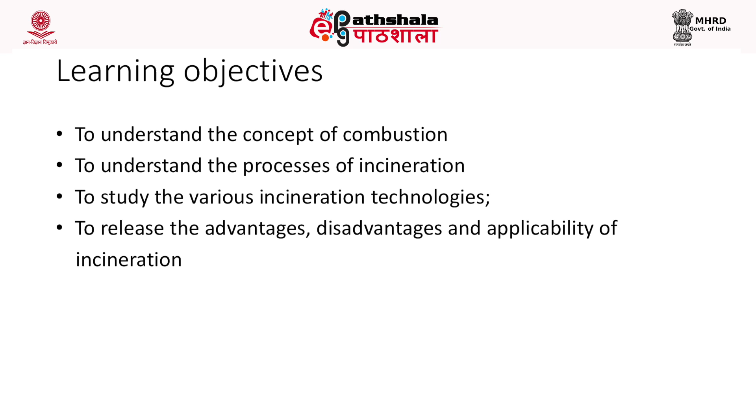So the learning objectives of this module include: first, to understand the concept of combustion, then to understand the process of incineration, to study the various incineration technologies, and finally we'll end up by studying the various advantages and disadvantages and applicability of incineration. Finally, we will also estimate the energy generation potential of various wastes.

Now, as I told you earlier, waste is an unwanted material that is of no use to the owner and hence is disposed of in an open area. Disposal into the land or water body is just not a solution, but they create a huge problem to the environment, thereby ending up in a lot of environmental and health hazards. The polluter pay principle, which is proposed in the Environmental Protection Act, it is for the environmental protection, and this acts as a force for the industries to treat the waste prior to disposal.

Thermal treatment is one option which uses a very high temperature to degrade or destruct the waste. They are designed to thermally degrade the waste and recover energy in the form of heat or electricity. Its main purpose is to reduce the impact of the residual waste on the environment.

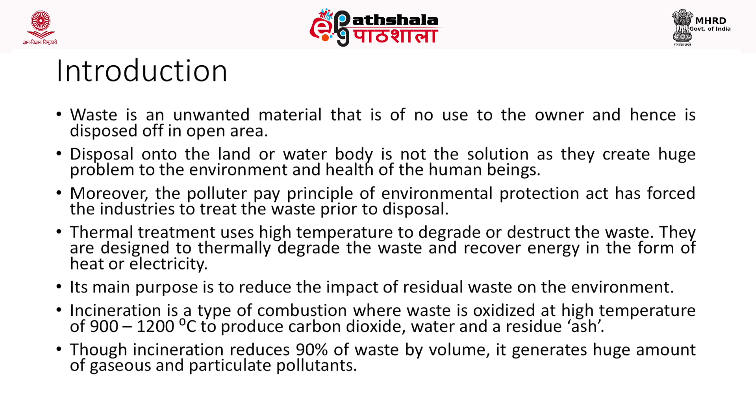So as I told you earlier, incineration is a type of combustion where the waste is oxidized in the presence of oxygen and high temperature of around 900 to 1200 degrees Celsius, resulting in the production of carbon dioxide and water and a residue called ash. Though incineration process reduces 90% of waste by volume, it generates a huge amount of gaseous and particulate pollutants. Now let's look into the combustion and then we will study about incineration.

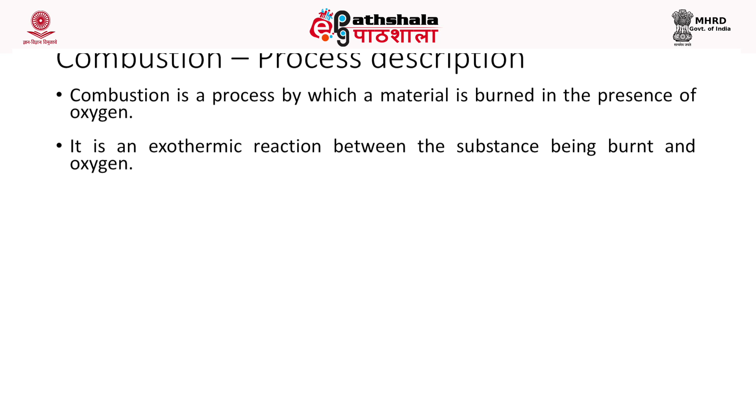Now what is combustion? Combustion is a process by which the material is burnt in the presence of oxygen. It is an exothermic reaction between the substance being burnt and oxygen. Combustion breaks down the organic and inorganic substances into a stable end product, carbon dioxide and water. The reactions occur between carbon and hydrogen and oxygen present in air to form carbon dioxide and water.

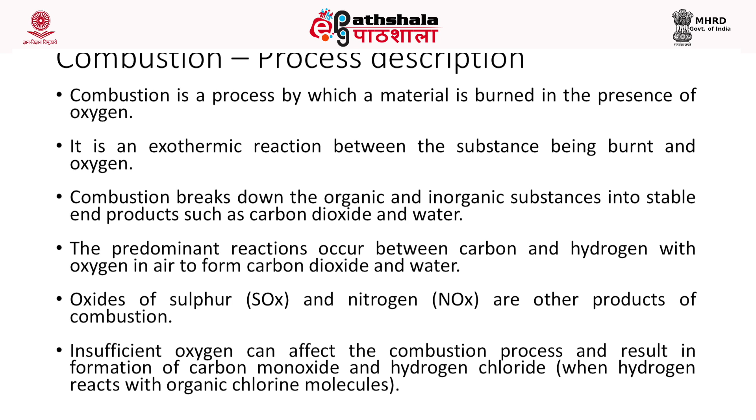In addition to carbon dioxide and water, the oxides of sulfur and oxides of nitrogen are also released during this process. Insufficient oxygen can affect the combustion process and they might result in the release of carbon monoxide, which is a very dangerous gas. As you all know, carbon monoxide is a very dangerous gas which combines with the hemoglobin of your blood and it reduces the oxygen carrying capacity of blood, which can be fatal. Carbon monoxide is harmful and hence to avoid its formation, you have to flush in sufficient amount of oxygen into the chamber.

All combustion furnaces should be provided with good mixing facilities to provide uniform distribution of air throughout the waste material and other gases released during the burning of waste. At the end of the combustion process, an incombustible particulate matter called bottom ash is left in the combustion chamber or the incinerator. Some amount of particulate matter is also emitted through the chimneys, and this is termed fly ash. So the particulate matter which is emitted outside the chamber along with the flue gas is termed fly ash.

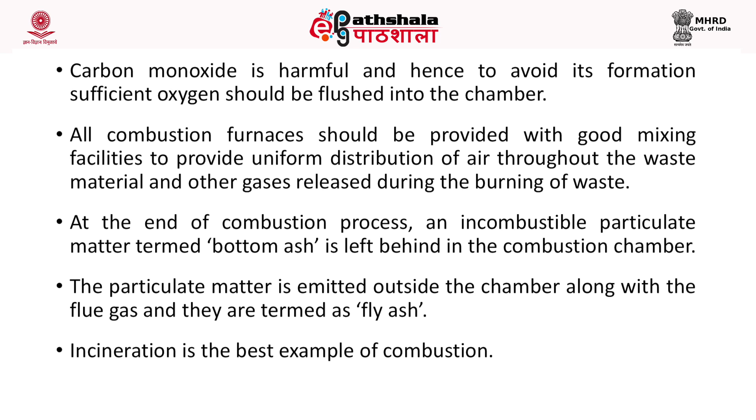Now, the incineration process is one of the best examples of combustion. As I told you earlier, incineration is a combustion process where the waste is burnt in the presence of oxygen at a very high temperature of about 900 to 1100 degrees Celsius. This temperature is selected, one, to ensure good combustion, second, to eliminate odor problems, and third, to protect the walls of the incinerator. Incineration is termed a thermal treatment and is considered the best alternative route for disposal of solid waste.

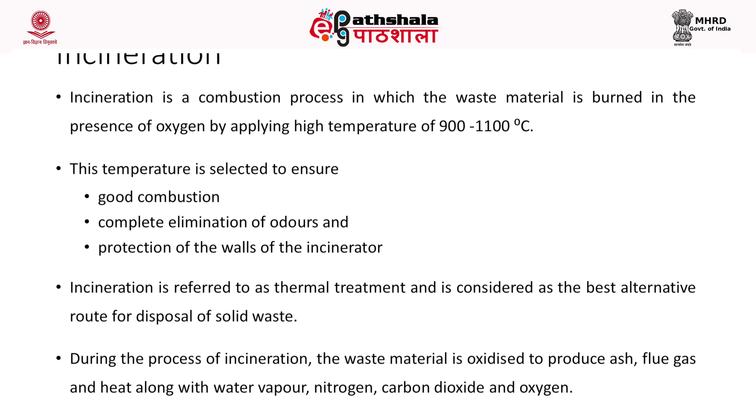During the process of incineration, the waste material is oxidized to produce ash, flue gas and heat along with water vapor, nitrogen, carbon dioxide and oxygen. In addition to carbon dioxide, other gases like carbon monoxide, hydrogen chloride, hydrogen fluoride, nitrogen oxides, oxides of sulfur, volatile organic carbon, dioxins, furans, and PCBs are also produced depending upon the nature of waste and the availability of oxygen.

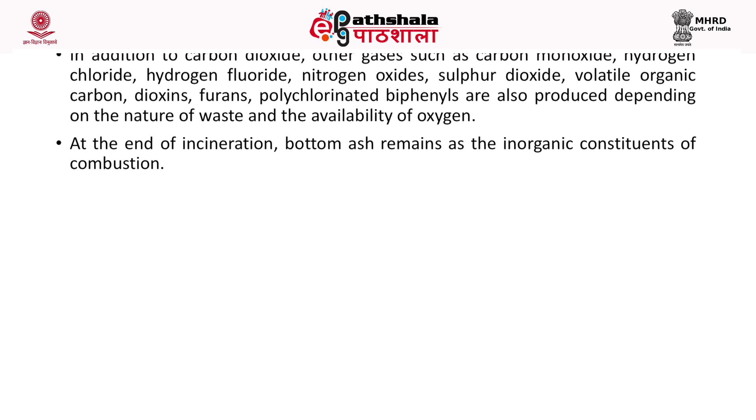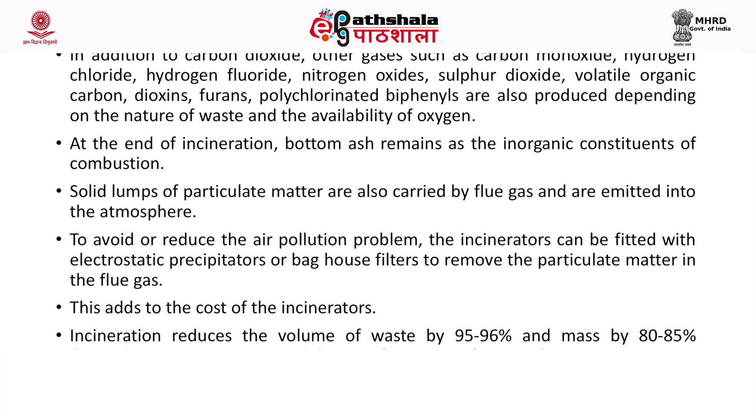At the end of incineration, bottom ash remains as the inorganic constituent of combustion. The solid lumps of particulate matter are also carried by flue gas and let out, which is called fly ash. In general, to avoid the emission of this particulate matter, that is the fly ash emissions, it is essential for a particular user to install an air pollution control device such as an electrostatic precipitator to remove this particulate matter so that it will not be released outside into the environment.

So, to avoid or reduce the air pollution problem, the incinerator can be fitted with electrostatic precipitators or baghouse filters to remove the particulate matter in the flue gas. And this adds to the cost of the incineration process. Incineration reduces the volume of waste by 95 to 96%, and by mass it reduces by 80 to 85%, depending upon the combustion and the degree of recovery of materials.

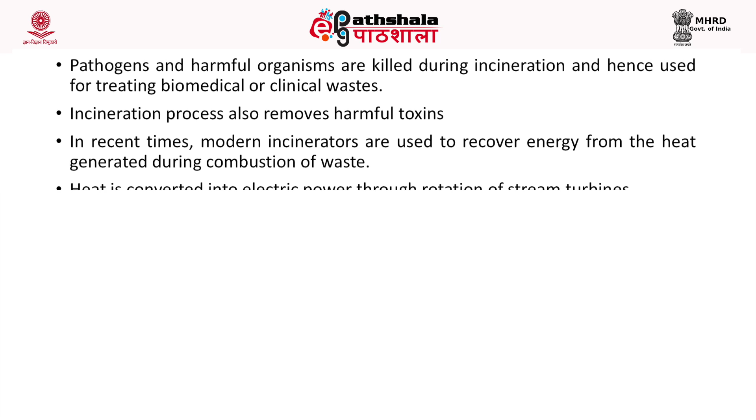At this high temperature, it also possesses the advantage of killing pathogens. The pathogens and harmful organisms are killed during incineration, and hence it is used for treating biomedical or clinical waste. The incineration process also removes harmful toxins. In recent times, modern incinerators are also used to recover energy from the heat generated during this combustion process.

Now, this energy can be used and converted into electricity. Since this advantage is associated with incinerators, they are categorized under systems where wealth can be recovered from waste. They are also called waste to energy processes. The heat that is generated from these incinerators is converted into electricity using steam turbines.

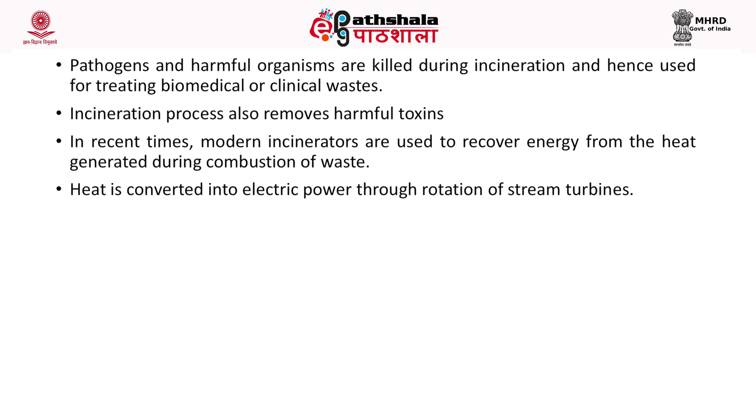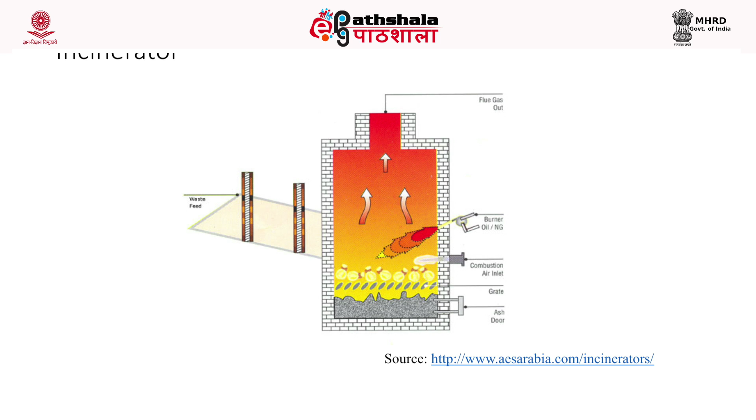Now this image shows the incinerator, where if you can see, it's a double walled furnace where the waste is added and heated in the presence of oxygen to produce ash and other gaseous products. Now ash, again as I told you, is of two types: bottom ash and fly ash, and you also have other gaseous pollutants. Now, what are the advantages of the incineration process?

First, incineration requires less space in landfills. As incineration reduces almost 95% of waste volume, the ash that is left as residue is taken to landfills for disposal. This reduces its space in the landfill. Second, incineration can be carried out near the point of waste collection. That means at the source of generation itself, you can install an incinerator and continue with the process, because they are considered compact units.

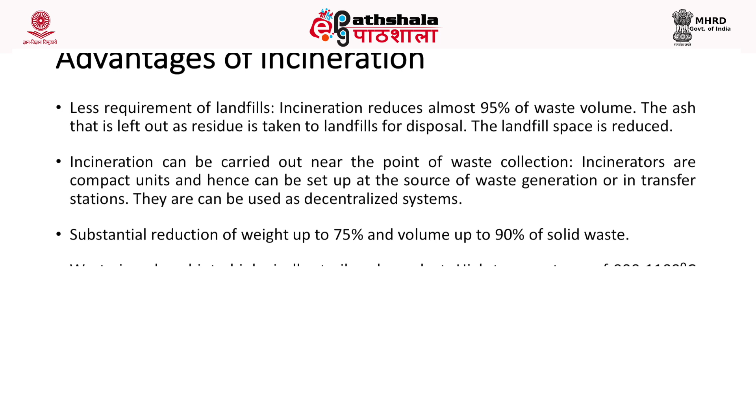So incinerators are compact units and hence can be set up at the source of waste generation or in transfer stations. They can be used as decentralized systems. Incineration results in substantial reduction of weight by up to 75% and by volume 90%. Also, it makes the product sterile. Waste is reduced into a biologically sterile ash product.

At high temperatures of about 900 to 1100 degrees Celsius, the pathogens and other harmful organisms present in the waste are killed, and hence it is sterilized. The residue, that is the ash which is left after incineration, is hence termed biologically sterile.

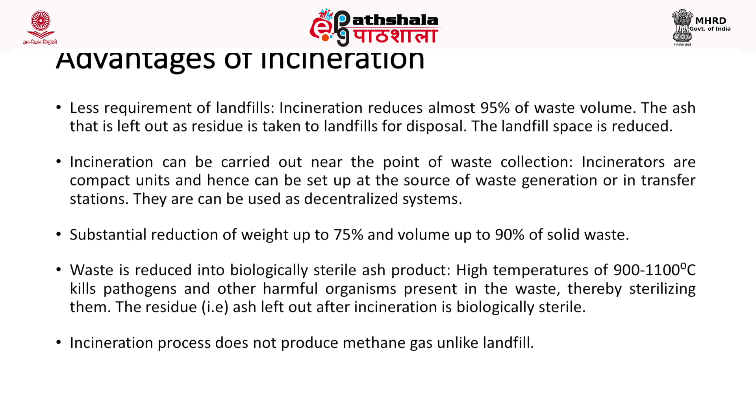The incineration process does not produce methane gas, unlike the landfills. As I mentioned earlier, it is also termed as a waste to energy process. Waste incineration can be a source of low cost energy to produce steam for electric power generation, industrial process heating, or hot water for district heating, thereby conserving primary fuel resources.

The bottom ash residue is considered as non-injurious and it can be used for material recovery or as secondary aggregates in construction. It is the best practical environmental option for many of the hazardous wastes like highly flammable, volatile, toxic and infectious waste.

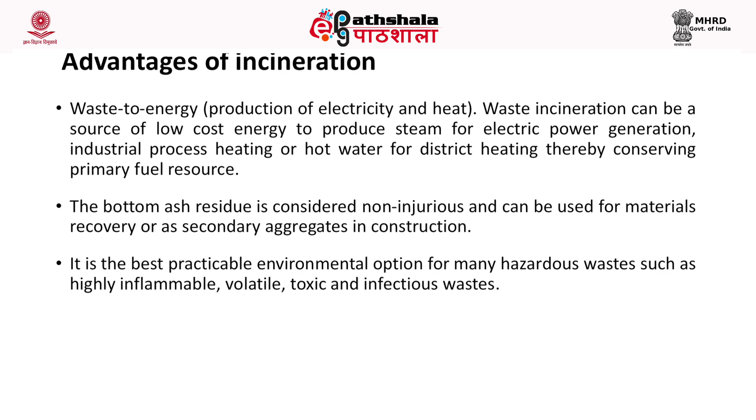Now the disadvantages. First, the main disadvantage of the incineration process is the emissions from these incinerators. During the process of incineration, a lot of gases are generated. Gases such as carbon dioxide, carbon monoxide, oxides of sulfur and oxides of nitrogen are commonly emitted during the process of oxidation. They are serious air pollutants.

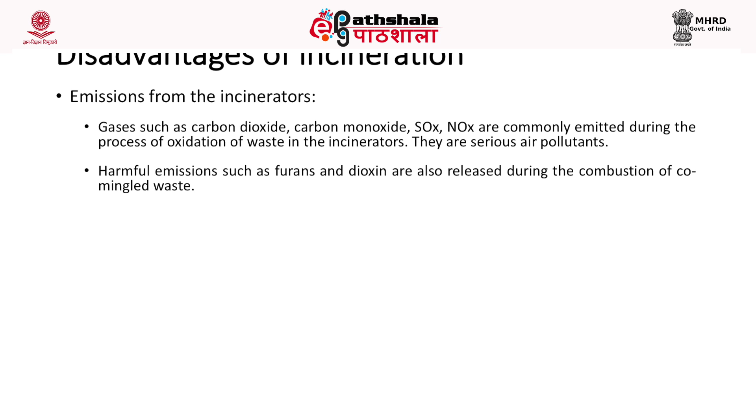Harmful emissions such as furans and dioxins are also released when you burn commingled municipal waste. The fly ash also contributes to particulate air pollution. These air pollutants endanger human health and also the environment, and hence they require air pollution control devices.

When you inhale this particulate matter, it can deposit in your respiratory system and lead to various breathing and respiratory problems. So that is a problem with particulate matter, and the gases, as you all know, have health effects. In addition to that, they also lead to a lot of environmental problems.

The second disadvantage is that it involves high investment, operation and maintenance costs. As incineration involves very high energy, around a temperature range of 900 to 1100 degrees Celsius, it is considered an energy intensive process, and hence it consumes more electricity for burning the waste. Thus, the cost of operation remains high.

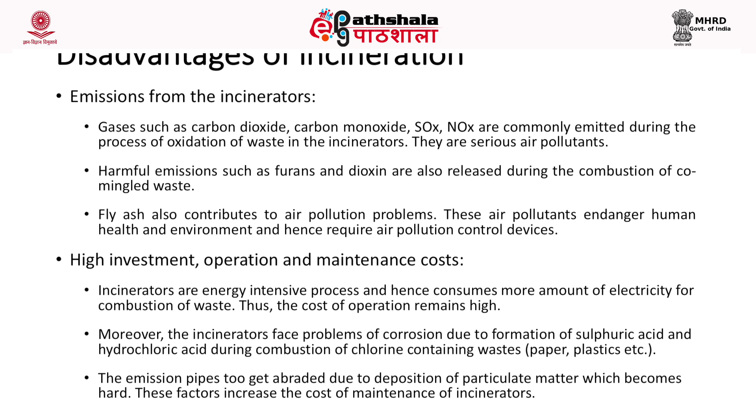Moreover, incinerators face problems of corrosion due to formation of sulfuric acid and hydrochloric acid during combustion. The emission pipes too get abraded due to the deposition of particulate matter, which becomes hard. These factors increase the cost of maintenance of these incinerators. A high capital investment cost is also involved for constructing these incinerators.

An inorganic residue produced by the incineration process further needs safe and proper disposal. Incineration plants are producers of a lot of heavy metals which are injurious even in minor amounts. Although modern incinerators comply with existing legislation, there is some public concern that the emitted levels may still have adverse effects on health.

Incineration is designed on the basis of a certain calorific value of waste. Removal of materials like paper and plastics for recycling may reduce the overall calorific value and may affect incinerator performance. Local communities have always opposed the presence of incinerators in their locality due to the problems associated with gaseous and particulate emissions. They also require skilled operators, which again adds to the operation cost.

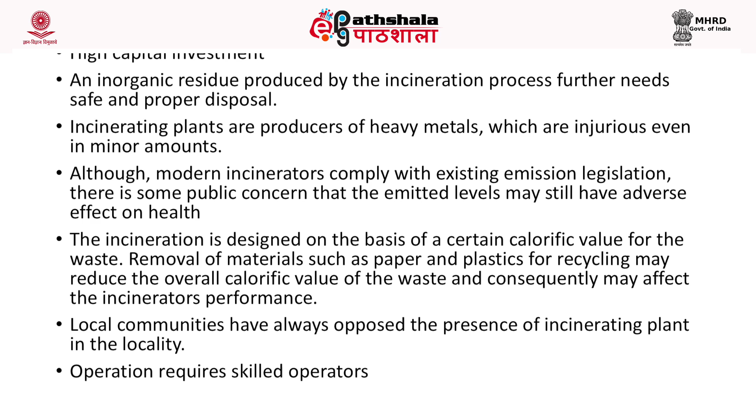Now, when can this incineration process be applied? Incineration can be applied only if the following criteria are fulfilled. First, it can be used in places where waste management has been practiced for a number of years. Second, at least 50,000 metric tons of waste should be available per year. Also, you should take care of the calorific value of waste, because it is very important to achieve efficient incineration.

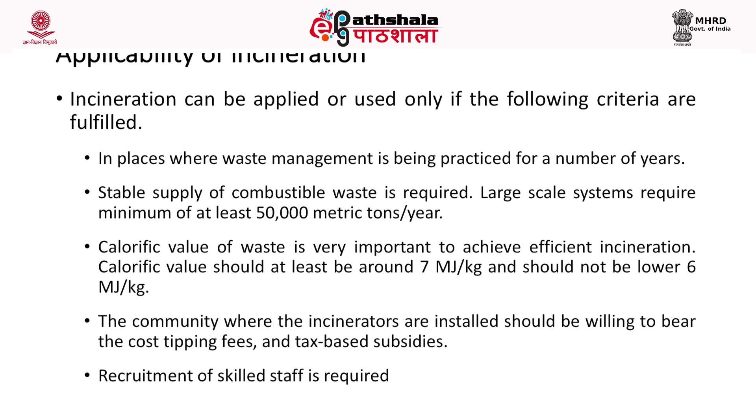The calorific value should be at least 7 megajoules per kg, and it should not be lower than 6 megajoules per kg. The community where the incinerators are installed should be willing to bear the cost of tipping fees and tax-based subsidies. The recruitment of skilled staff is also required if you go for an incinerator as an option. Now, let's look into the various systems available for the incineration process.

An incinerator is designed to maximize the combustion efficiency of waste and heat output. It should focus on minimizing emissions by balancing oxygen and time, temperature and turbulence. The 3 T's, that is time, temperature and turbulence, should be maintained throughout the process. On the basis of the capacity, nature of waste to be combusted and the type of system, incinerators are classified into the following types. 1.

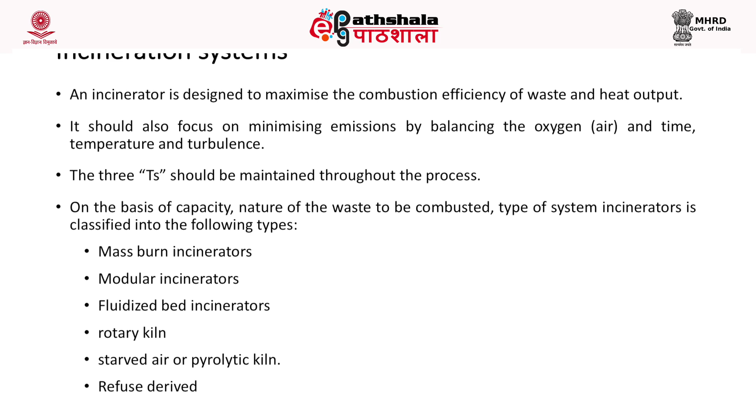The mass burn incinerator, modular incinerator, fluidized bed incinerator, starved air incinerator, refuse derived fuel and rotary kiln incinerators. Now, mass burn incineration. Incineration done on a large scale is termed as mass incineration. It is a simple and a flexible method and is most commonly used for municipal solid waste.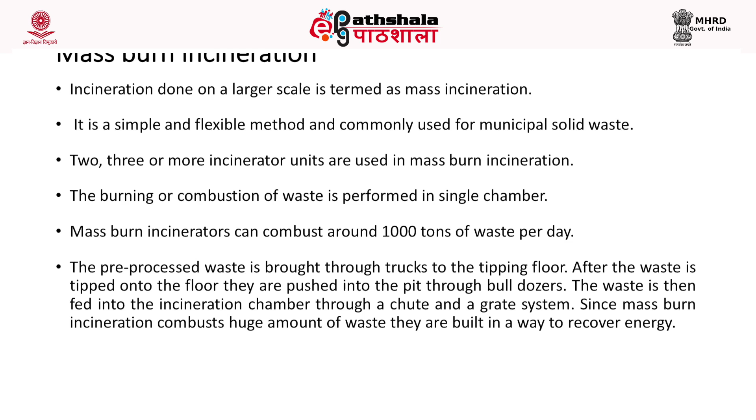The waste is then fed into the incineration chamber through a chute and a grate system. Since mass burn incineration combusts huge amounts of waste, they are built in a way to recover energy. And in case of modern incinerators, it consists of a refractory lined combustion system with steam generator to recover energy in the form of

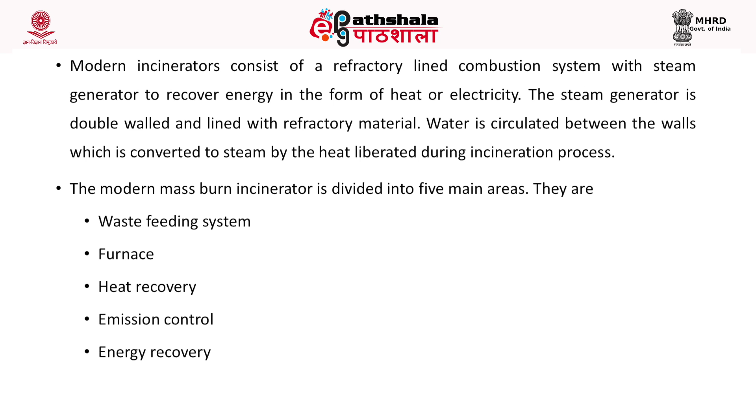heat or electricity. The steam generator is generally double-walled and lined with a refractory material. The water is circulated between these walls, which is converted to steam by the heat liberated during the incineration process. The modern mass burn incinerator is divided into 5 main areas. They consist of a waste feeding system, a furnace, heat recovery, emission control and energy recovery system.

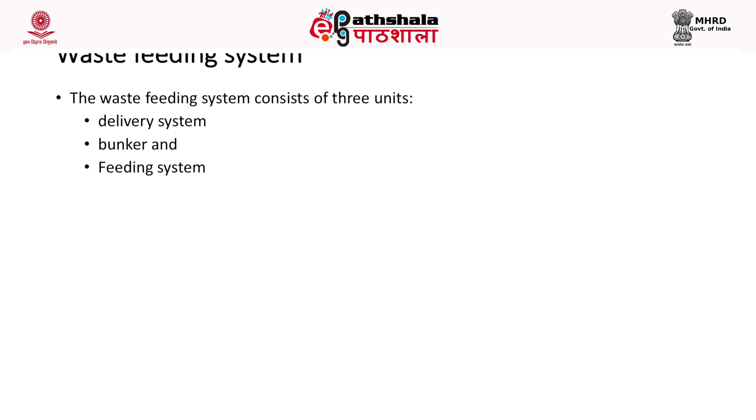Waste feeding system. The waste feeding system consists of 3 units: a delivery system, a bunker system and a feeding system. The waste collection vehicles that enter a processing site are weighed at the entrance on arrival and departure to determine the charge for disposal and incinerator operation. The waste brought to the processing site is stored in bunkers till it is fed into the incinerators. Bunkers in general act like temporary storage sites.

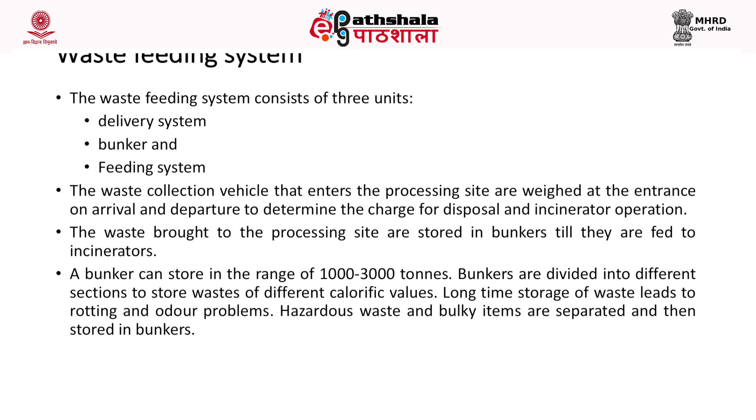Bunkers can store waste in the range of 1000 to 3000 tons. They are divided into different sections for storing the waste of different calorific values. Long-term storage of waste leads to rotting and odor problems, and hazardous waste and bulky items are separated and then stored in bunkers. The feeder consists of a steel hopper through which the waste is fed into the incinerator, and through the grate by hydraulic ram the waste is fed.

To avoid any air leakage into the furnace, the hoppers are half filled with waste and the hydraulic shutters are used to seal the hoppers at the furnace entrance to prevent the fire from burning back. Additionally, the feed chute can be water-cooled or refractory lined to prevent fire.

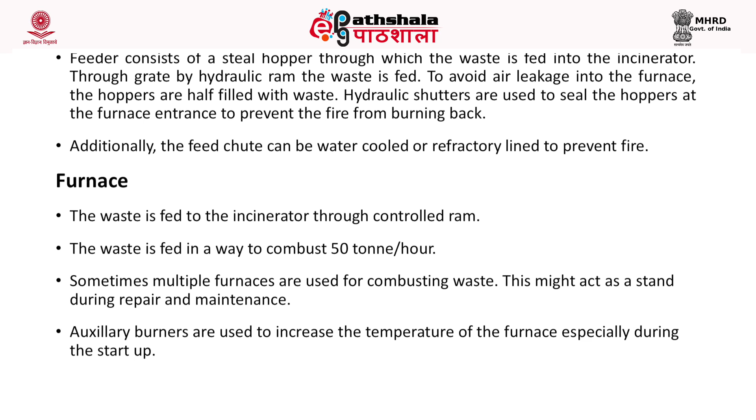Furnace. Here the waste is fed into the incinerator through a controlled ram, and it is fed in a way to combust around 50 tons of waste per hour. Sometimes multiple furnaces are used for combusting waste, and this might act as a standby during repair and maintenance. The auxiliary burners are used to increase the temperature of the furnace, especially during startup.

Now, 3 stages of incineration occur inside the furnace: first, drying and devolatilization; second, combustion of volatiles and soot; and third, combustion of solid carbonaceous residue. Now, what happens in drying and devolatilization is, once the waste enters into the system, the moisture is removed as it is preheated.

Then the organic matter undergoes thermal decomposition and results in the generation of volatile organic matter, that is hydrogen, carbon monoxide, methane, ethane and other high molecular weight hydrocarbons. In addition to that, you also have combustible gases and other vapors being produced. Now, devolatilization occurs at a temperature of 200 to 750 degrees Celsius and it begins at the end of the drying phase. It releases volatiles at a temperature of 425 to 550 degrees Celsius, depending on the nature and the physical state of the waste.

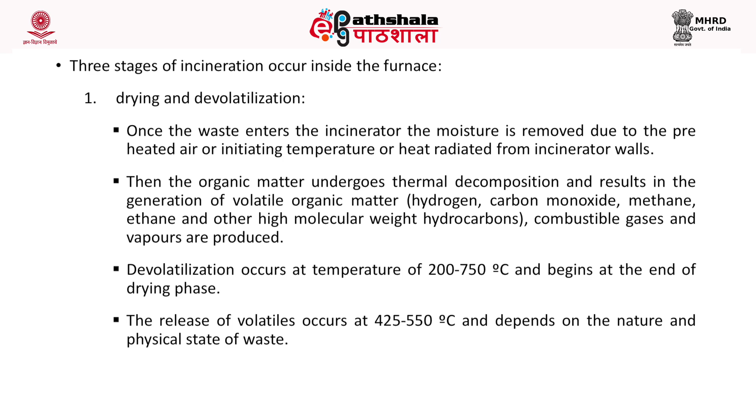In the combustion of volatiles and soot, the volatiles released are burned in the combustion chamber located above the grate. High temperature, complete mixing, excess air and long residence time are required for complete combustion of volatiles. The gases formed are subjected to 850 degrees Celsius for only 2 seconds to achieve complete combustion of volatiles. Temperatures above 1200 degrees Celsius should be avoided to prevent the formation of slag by fusion of ash residue.

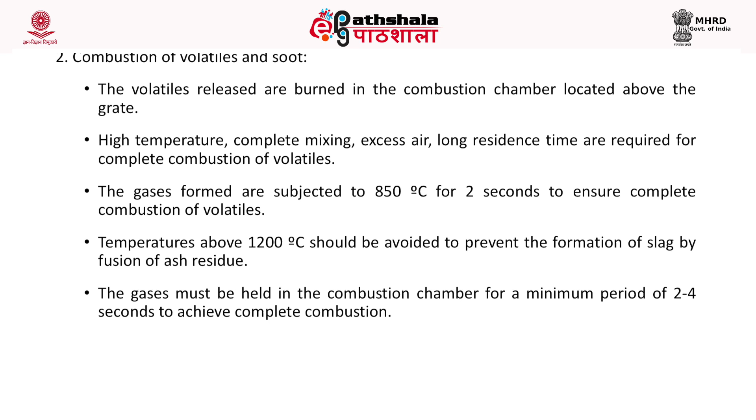The gases must be held in the combustion chamber for a minimum of 2 to 4 seconds to achieve complete combustion. Now, in the combustion of solid carbonaceous residue, once the volatile gases are burnt, the residue consists only of carbon in the fixed form.

The char is burnt in a grate for 30 to 60 minutes. The ash, that is the bottom ash, which is around 30% of solid waste, is discharged into a water trough for cooling, which is then collected and disposed of in landfills. The fly ash, which is released out through the flue gas, is collected through cyclone separators, electrostatic precipitators and bag filters, and then they are disposed of.

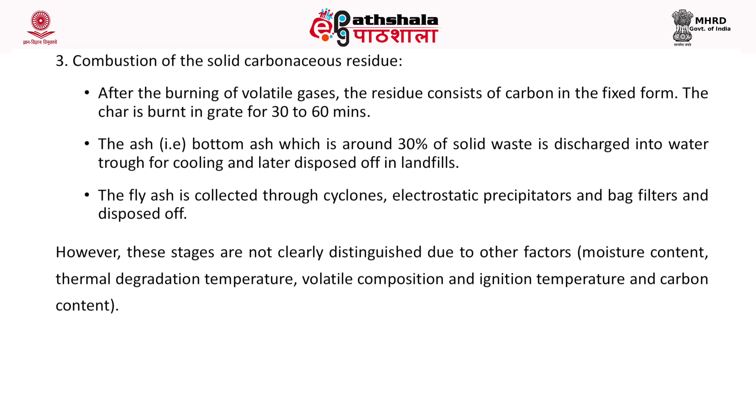However, these stages are not clearly distinguished due to the factors involved in them. The moisture content, thermal degradation, volatile composition and ignition temperature are some of the factors.

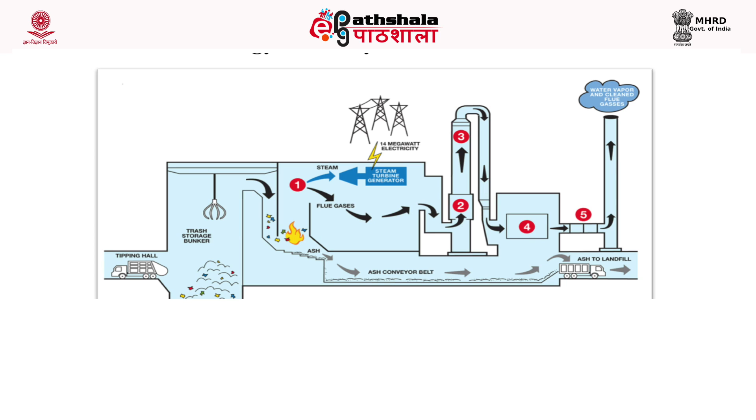And the flue gas which is generated is taken off to the pollution control devices like the acid gas removal system, that is a scrubber, and to remove mercury or dioxins, and then the particulate matter. And then the gas is taken for pollution control tests and then released out into the air.

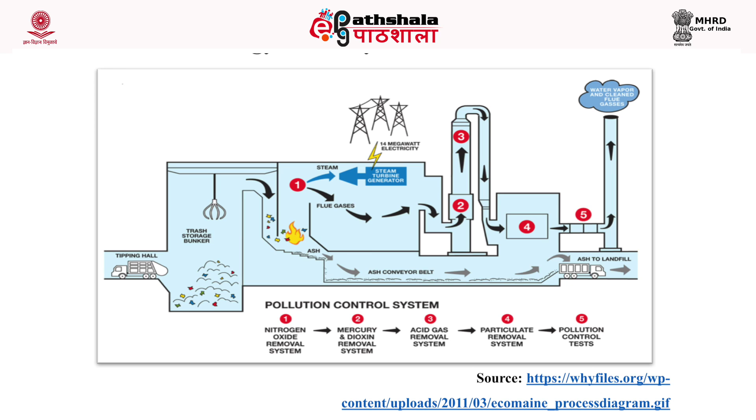Now the heat that is generated is taken up and it heats up the water which is stored there and it forms steam. Now steam is taken up to rotate the turbines, from which the electricity is generated.

Now next is the heat recovery. The heat generated during the incineration process escapes as flue gas at a temperature of approximately 1000 to 1200 degrees Celsius. The flue gas is cooled in boilers where the heat is used to boil the water and convert it to steam. The flue gas is of corrosive nature and it contains a high level of particulate matter.

The emission control: the emissions such as flue gas, particulate matter and other acid gases such as hydrogen chloride, hydrogen fluoride, oxides of sulfur and heavy metals are controlled using air pollution control devices like scrubbers, absorption units, cyclone separators, bag filters and electrostatic precipitators.

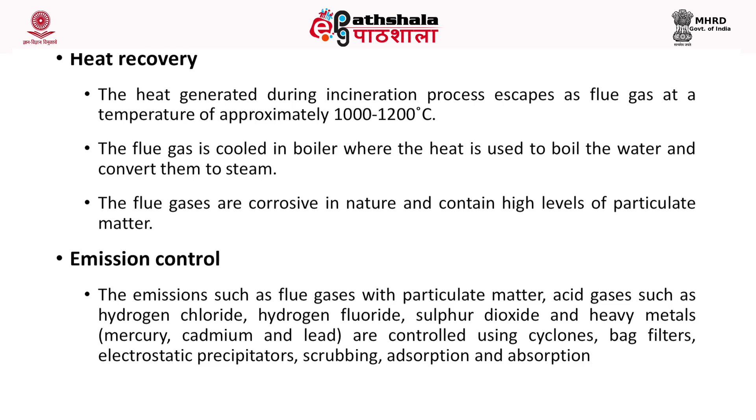As mentioned earlier, for the energy recovery, the steam that is generated by the boilers rotates the turbine due to high pressure and temperature. Through various stages, the velocity of the turbine shaft increases and results in the generation of electricity. Around 0.3 to 0.7 megawatt hours of energy is produced from incinerators while combusting 1 ton of municipal solid waste. It depends on parameters like the calorific value, the plant size and the steam parameters.

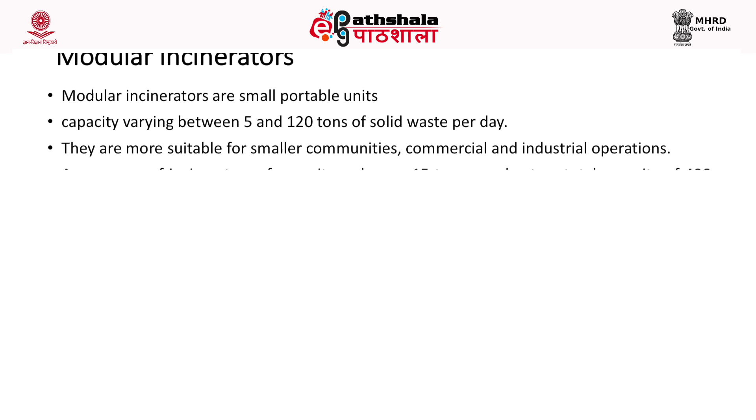Now the second type of incinerator is a modular incinerator, and these modular incinerators are small portable units. Their capacity varies between 5 to 120 tons of solid waste per day. They are more suitable for smaller communities, some commercial operations and industrial operations. And if you want, you can also add 2 or 3 units along with the existing units.

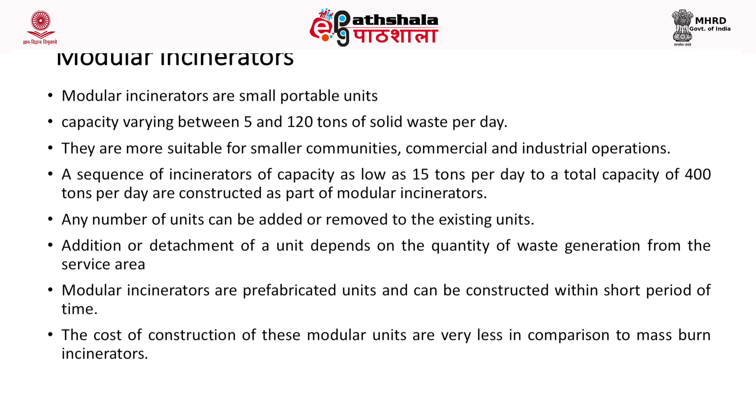A sequence of incinerators of capacity as low as 15 tons per day to a total capacity of 400 tons per day can be constructed as a part of modular incinerators. Addition or detachment of units is possible, as I mentioned earlier. Modular incinerators are also prefabricated units and can be constructed within a short period of time. The cost of construction of these modular units is very low when you compare with mass burn incinerators.

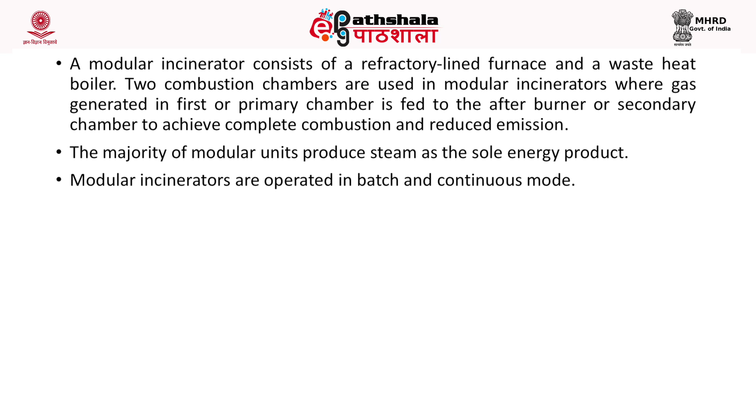A modular incinerator consists of a refractory lined furnace and a waste heat boiler system. There are 2 combustion chambers used in a modular incinerator, where gas generated in the primary chamber is fed to the afterburner or secondary chamber to achieve complete combustion and minimize the emissions. The majority of modular units produce steam as the sole energy product and they are operated in both batch and continuous mode.

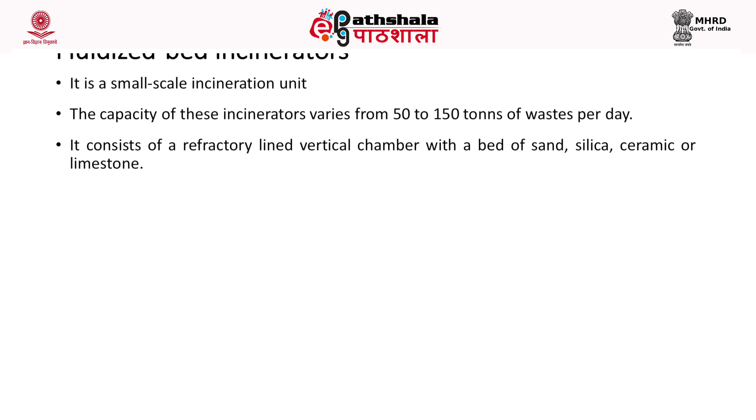The next type is fluidized bed incinerators. Again, this is a small scale unit. The capacity varies from 50 to 150 tons of waste per day and it consists of a refractory lined vertical chamber with a bed of silica sand, ceramic or limestone. Now the air is blown from the bottom of the chamber to fluidize the bed material. The heat supplied to the bed and the increasing air velocities cause the bed to bubble. These beds operate under long residence time.

And the solid particles are thereby exposed to the hot zone for a long period of time. The turbulence generated within the chamber causes the solid material to flow above. Now, the cyclone separator is fixed to collect and recirculate the material back to the bed. The advantage of doing so is better combustion with minimized air emissions due to high burnout.

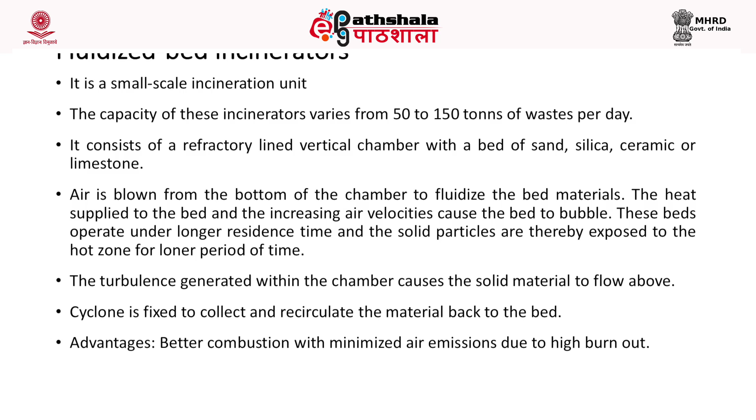To achieve better combustion, the bed material also should be preheated. Also, you can shred the waste and add it, which will also increase the combustion efficiency. The dispersion of incoming waste and sufficient residence time are major reasons for complete combustion in fluidized bed incinerators.

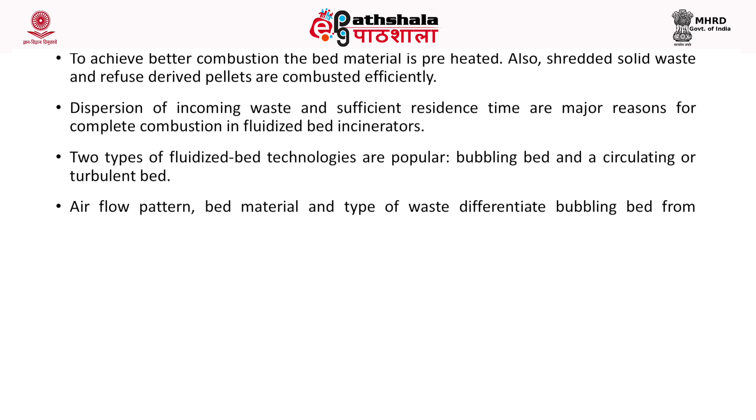Now, there are two types of fluidized bed technologies. One, the bubbling bed, and the other one is circulating or turbulent bed. The airflow pattern, bed material and the type of waste differentiate the bubbling bed and the circulating bed incinerators. Now, fluidized bed incinerators are more compatible with high recovery recycling systems.

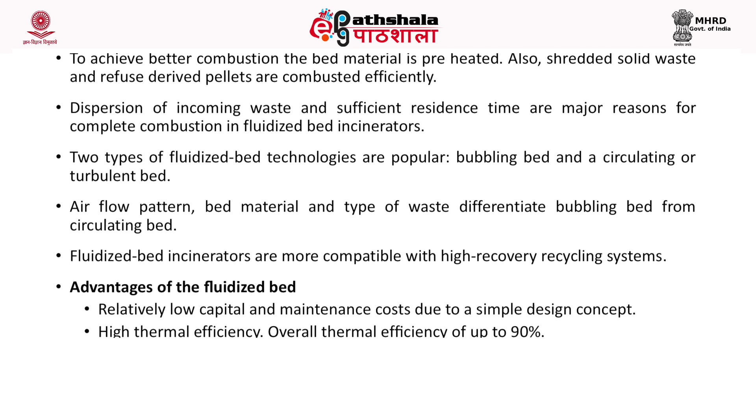Now, some of the advantages and disadvantages of the fluidized bed system include: the advantages are they are relatively low in capital and maintenance costs because of their simple design aspect. They have a very high thermal efficiency of around 90%. They are very flexible, they are consistent, and they have a very high energy conversion efficiency.

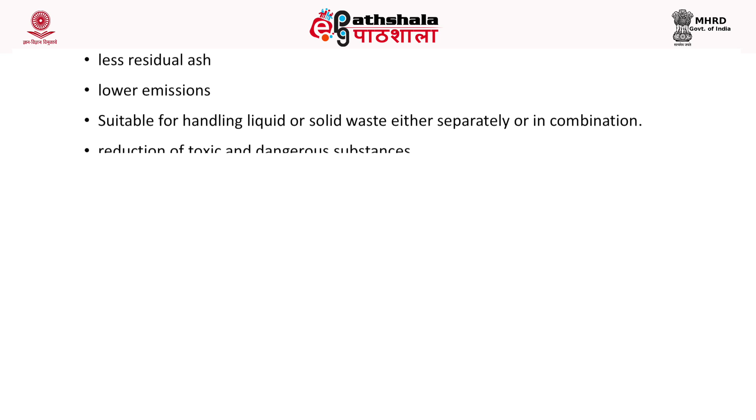Also, they produce less ash, resulting in lower emissions. They are suitable for handling both solid as well as liquid waste, either separately or in combination. They also reduce the toxic substances and other dangerous substances, and they have a multi-fuel input.

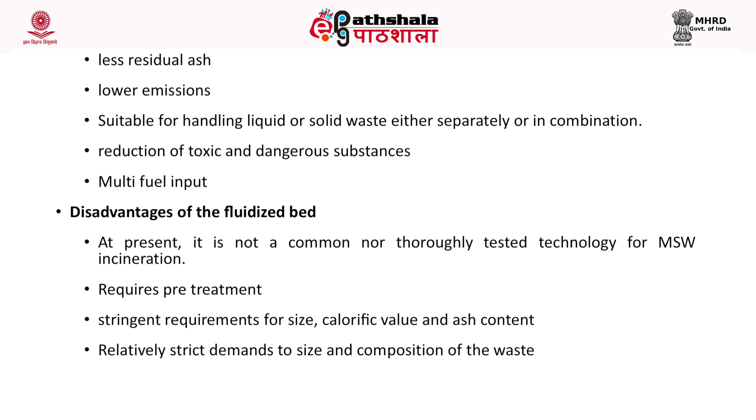The disadvantages are it is not so common nor is it a completely tested technology. It requires pretreatment, and stringent requirements for size, calorific value and ash content. Relatively strict demand to size and composition of waste is essential.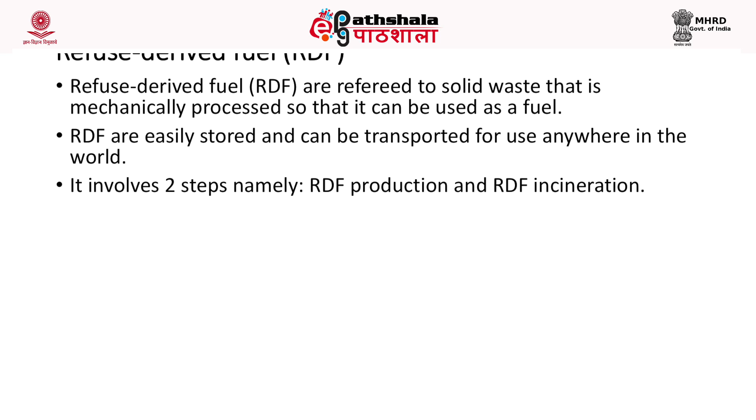The next type is the refuse derived fuel. The refuse derived fuel, termed as RDF, refers to solid waste that is mechanically processed so that it can be used as a fuel. Now, RDF is easily stored and transported for use anywhere in the world. It is prepared by two steps: RDF production and RDF incineration. The waste material is segregated, shredded and then pelletized.

How is it done? The waste is dropped onto the tipping floor and through the conveyor belt it is carried to a segregation or sorting site. The waste is carried through a conveyor belt on top of which a strong magnet is passed to separate the ferrous metals. After the basic screening, the waste is then made into small pellets by pelletizing units.

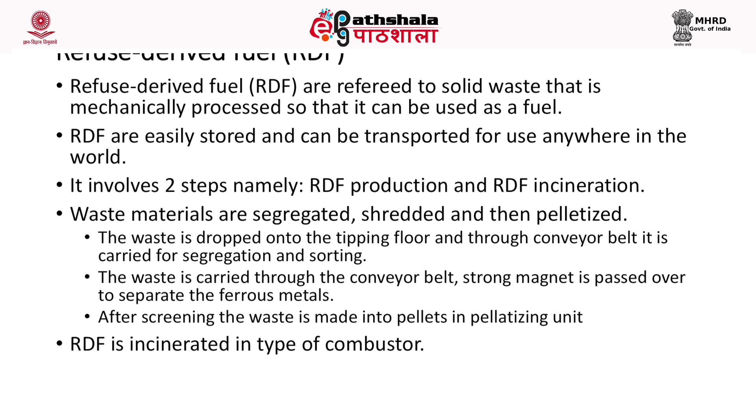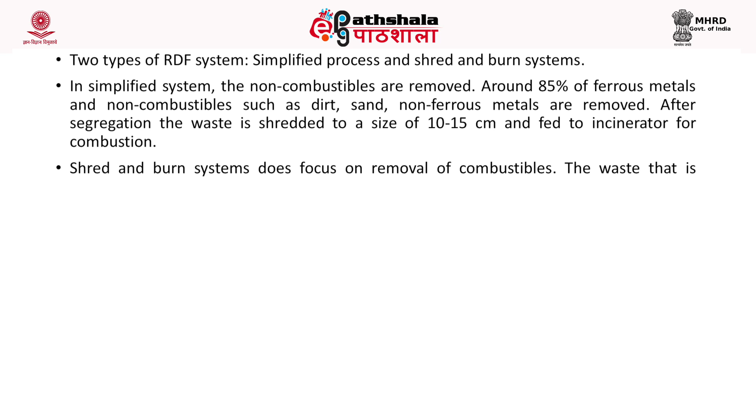Now, RDF is incinerated in combustors. Two types of RDF systems are there. One is simplified and the other one is shred and burn systems. In a simplified system, the non-combustibles are removed: about 85% of ferrous metals and non-combustibles such as dirt, sand, non-ferrous metals are removed and segregated, and the segregated waste is then shredded to a size of 10 to 15 centimeters and then fed into incinerators.

In a shred and burn type, they do not focus on removal of combustibles. The waste that is dropped onto the tipping floor is shredded and then directly fed into the incinerator without any segregation. Now, this type of RDF production is considered to be the easiest and simplest because it requires minimum processing. But the ash that comes out of the incinerator can be subjected to a magnet for the removal of non-ferrous metals.

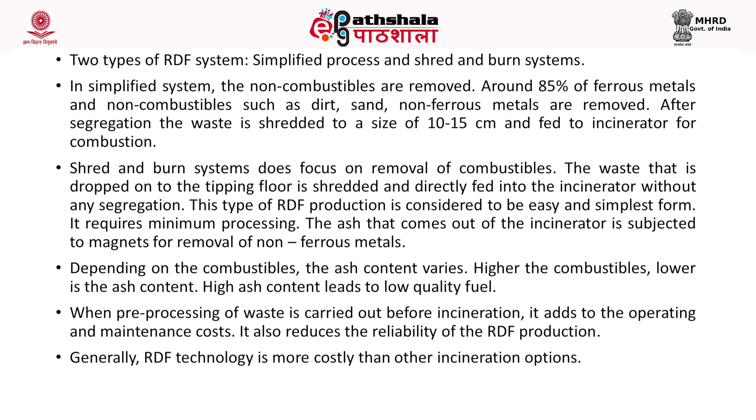Now, depending on the combustibles, the ash content also will vary. Higher the combustibles, lower will be the ash content. High ash content will always lead to a low quality fuel. So, when pre-processing of waste is carried out before incineration, it will add to the operating and maintenance cost. It will also reduce the reliability of the RDF production process. Generally, RDF technology is more costly than all other incineration processes.

The next type of incinerator is starved air incinerators. Again, it is a small scale system with two combustion chambers, pyrolytic and combustion chamber.

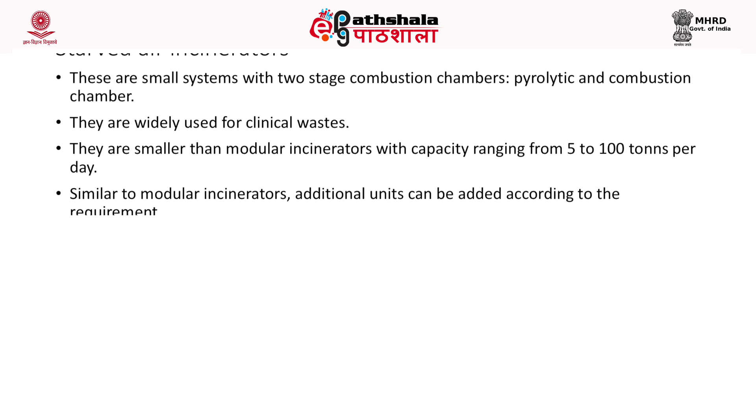They are widely used for clinical waste, that is the biomedical waste. These systems are smaller than modular incinerators and they have a capacity ranging from 5 to 100 tons per day. Similar to modular incinerators, the additional units can be added according to the requirement.

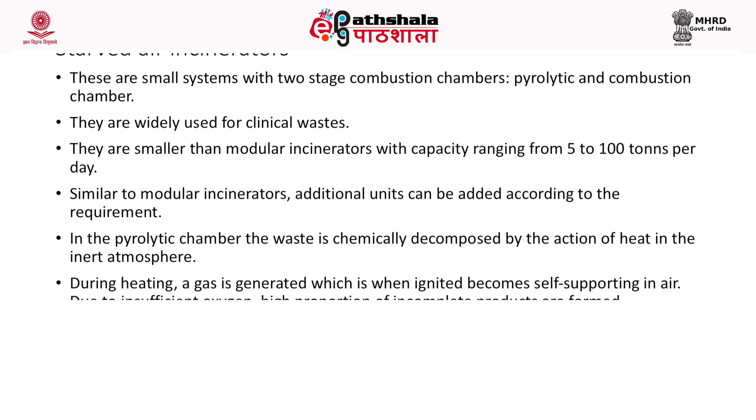In a pyrolytic chamber, the waste is chemically decomposed by the action of heat in the inert atmosphere. During heating, a gas is generated, which when ignited becomes self-supporting in air. Due to insufficient oxygen, a high proportion of incomplete products are formed. The carbon monoxide and hydrogen that is formed is sent to the second combustion chamber where they are subjected to 200% excess air. Now this will increase the temperature of the chamber and will end up in combusting the waste.

And hydrogen and carbon monoxide will be converted into carbon dioxide. The dioxins and the PCBs are also broken down in the second chamber, and during this process NOx is not formed. In the second chamber, turbulence and mixing occurs due to gas that enters from the first chamber.

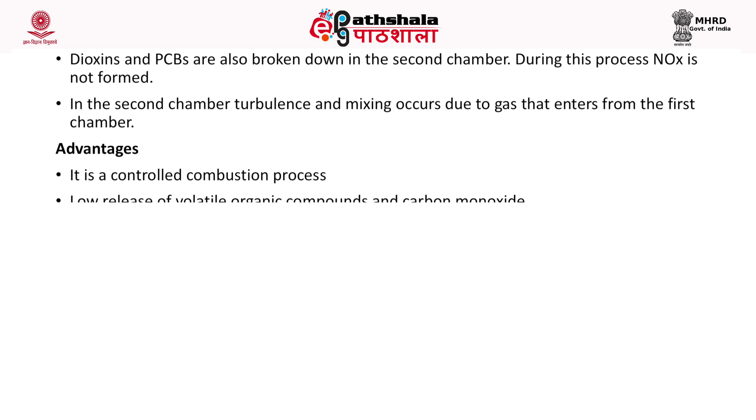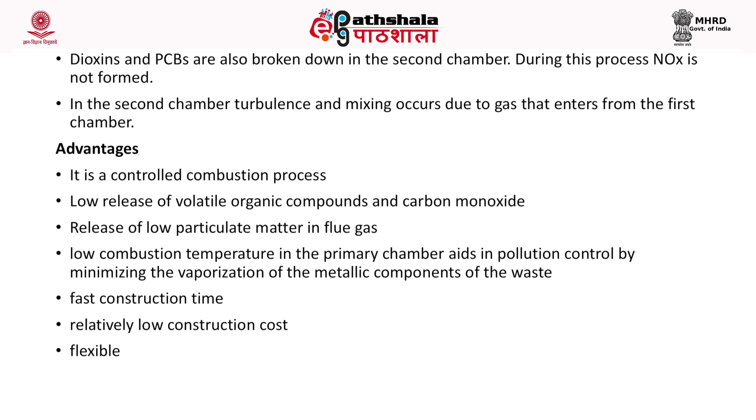The advantages of this process include it is a controlled combustion process, it releases less amount of volatile organic compounds and carbon monoxide, and also low level of particulate matter is released in the flue gas. Low combustion temperature in the primary chamber aids in pollution control by minimizing the vaporization of metallic components of the waste. The construction time is very less, I mean it can be constructed very fast, and they have a relatively low construction cost, so they are also flexible systems.

Now looking into the disadvantages, they are of limited size, they show a lower thermal efficiency, they require a very high maintenance cost and a shorter equipment life.

When you are using the incineration process with an objective of generating energy from the incineration process, it is essential for us to know the energy content of waste. Now this section will help you in calculating the energy content of each waste. Now the energy content of waste can be calculated using the values of ultimate analysis of waste. Ultimate analysis, which we have already studied in the previous module, involves the analysis of the carbon, hydrogen, sulfur, oxygen percentage of waste. Now the energy content of waste can be expressed as either kilojoules per kg or BTU per lb.

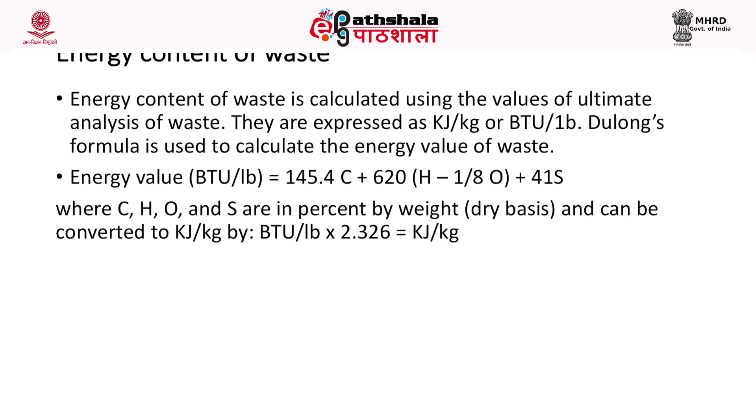Now energy content can be calculated using Dulong's formula, which is given below: 145.4C plus 620(H minus 1/8 O) plus 41S, where S denotes sulfur, C denotes carbon, H denotes hydrogen and O denotes oxygen. And all these are taken as percentage by dry weight basis. The value which you get is in BTU per lb, and if you multiply the value with 2.326, you can get the energy content in terms of kilojoules per kg.

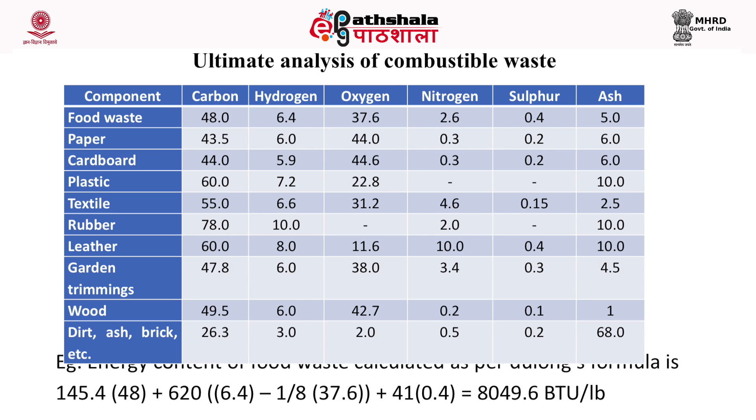Now this table shows you the ultimate analysis of the combustible waste. The types of waste are listed in the left column: food waste, paper, cardboard, plastic, textile, rubber and so on. And on the right side you can find the percentage of carbon, hydrogen, oxygen, nitrogen, sulfur and ash for each particular waste. An example is provided here for calculating the energy content of food waste. Based on the ultimate analysis, you can see the food waste possesses an energy content of around 8049.6 BTU per lb.

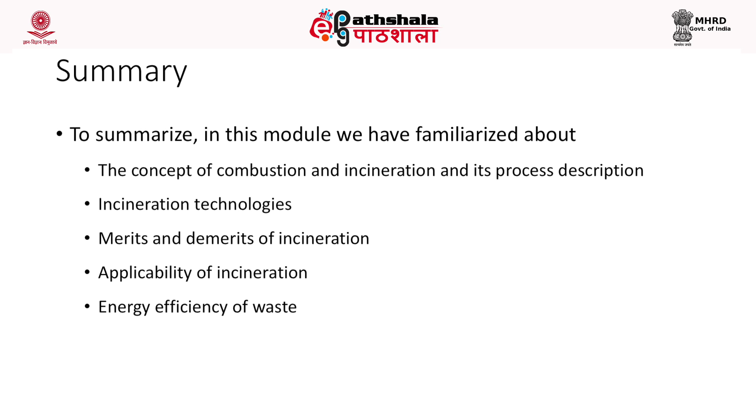To summarize, at the end of this module, we have studied about combustion, what is a combustion process, how the combustion process occurs in the presence of oxygen, and how high temperature and oxygen can break down or thermally destruct the waste into the gaseous products and a solid residue called ash. Now, incineration is a type of combustion process where the waste is subjected to a temperature of around 900 to 1200 degrees Celsius in the presence of oxygen. It results in the release of gaseous products and a solid residue called the bottom ash. Some amount of solid residue is also released along with the flue gas, called the fly ash, and to avoid its emittance into the external environment, you can connect air pollution control devices which will minimize your particulate as well as gaseous emissions.

Then, we also looked into the various advantages and disadvantages of the incineration process. We discussed the various incineration technologies like the starved air incinerators, the mass burn modular incinerators, and the refuse derived fuel incinerators, and also the advantages and disadvantages of each of these incinerators. We also studied the energy content, how to calculate the energy content of a waste from the ultimate analysis of waste. We also listed out the various conditions where the incineration technologies can be used.